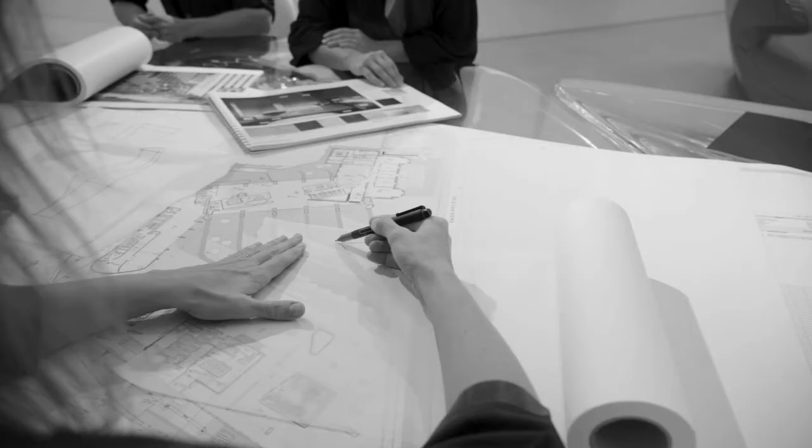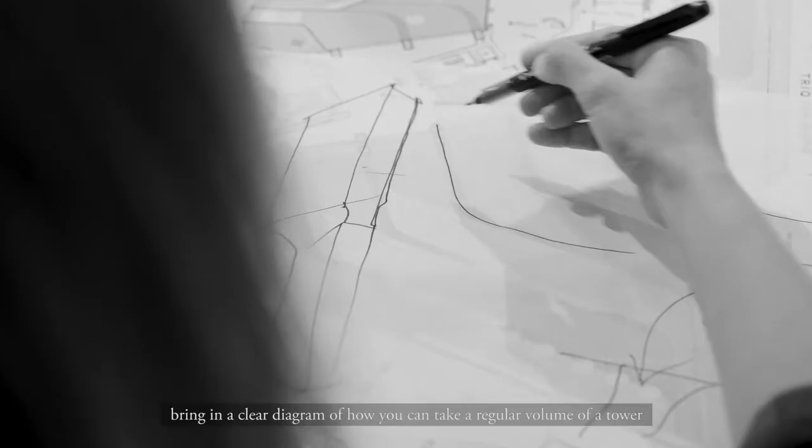Zaha used to say that she loves Mediterranean cities. The reason is that they're layered and full of surprises. With our work, we always try to challenge this idea that a room needs to be 90 degrees, a building needs to be a cube, and so on. What we've done with this project, which Zaha personally oversaw at the very beginning, is to bring in a quite clear diagram of how you can take a regular volume of a tower and really twist it, and see what happens when you do this.

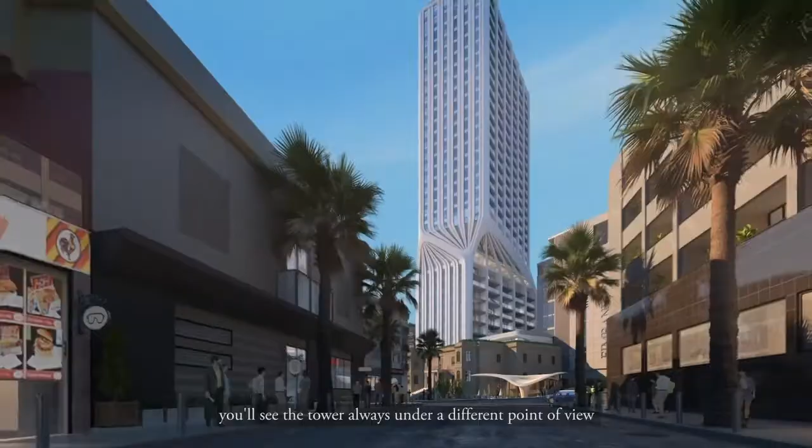As you approach the project from the various streets leading to the main square, you'll see the tower always under a different point of view, and the twist will represent a constant surprise.

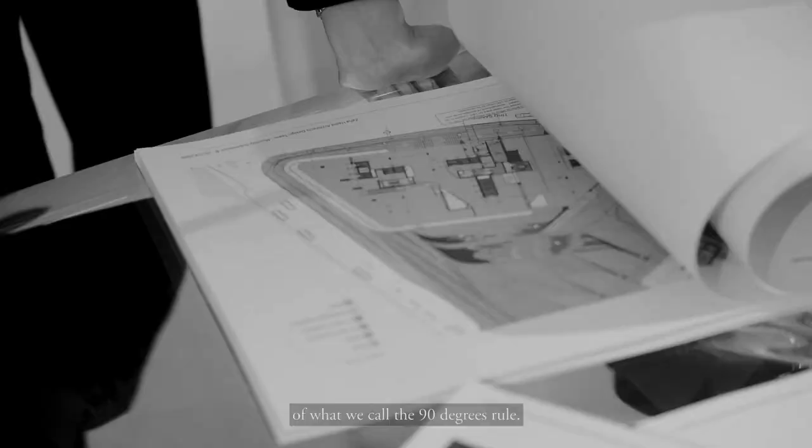Zaha used to say that life doesn't work with 90 degrees. All our work, in a way, is focused on challenging what we call the 90 degree rule. 90 degrees isn't something that happens in nature. In nature, what you have is a variety of geometrical constructs.

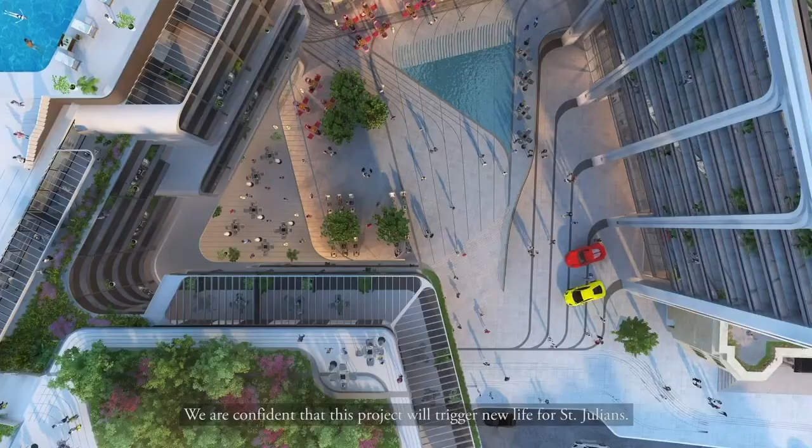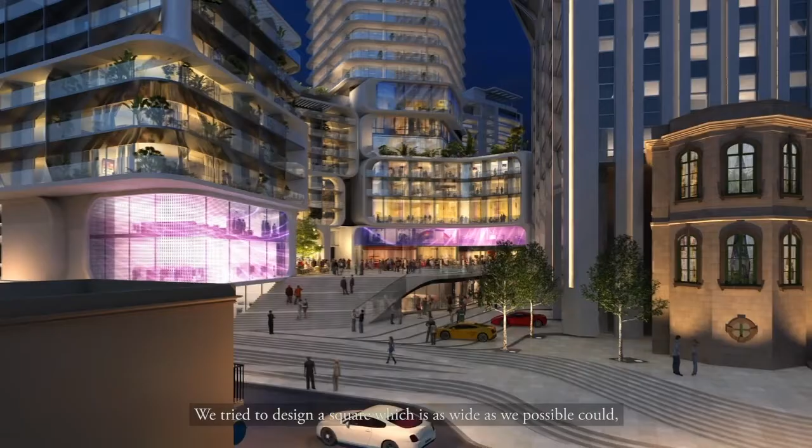We are confident that this project will trigger new life for St. Julians. We are hoping it will mean that St. Julians becomes more inclusive and more appropriated by the residents. We tried to design a square which is as wide as we possibly could. It's a moment of relaxation, very green, including reflection pools, so it's a very nice and calm moment within the busy life of St. Julians.

Great, I hope this was the best start for you to see more visually talking about the project.

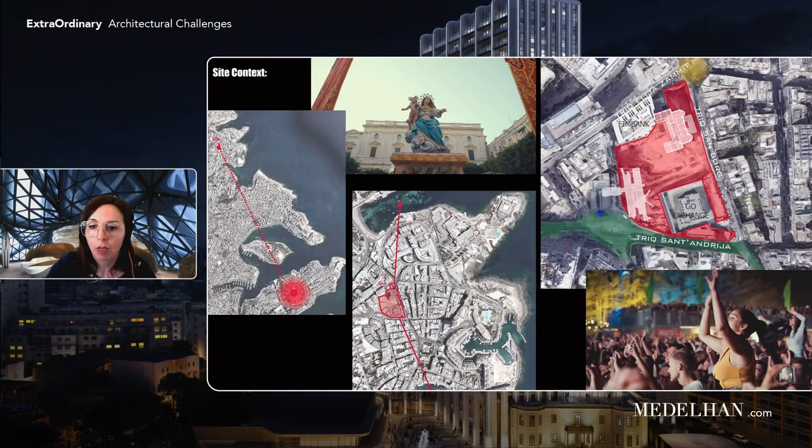We designed this project with Zaha just before her untimely passing, unfortunately. So in a way, this project was lucky enough to have the chance to give Zaha the possibility of tangibly expressing her own spatial philosophy.

The idea that we introduced is quite simple. We wanted to just work with a very simple tower block, but giving it this extra twist. And we think this is an interpretation of what Zaha was claiming as a refusal to adhere to a 90 degrees rule.

We wanted a project that is full of surprises, and because of this shape, it will appear completely different whenever it's seen through the various tiny alleyways in Paceville.

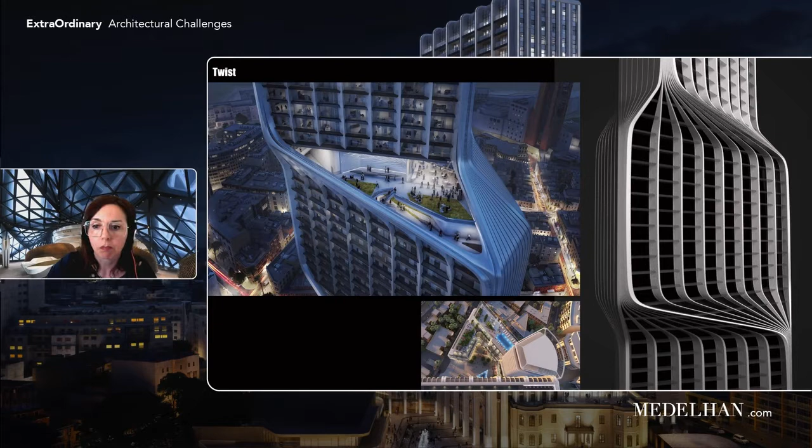We wanted it to be surprising inside as well as outside. So on the inside, we used the twisting of the tower to provide opportunities for some really unexpected open spaces, such as a pool floating midair and looking down onto San Giuliano.

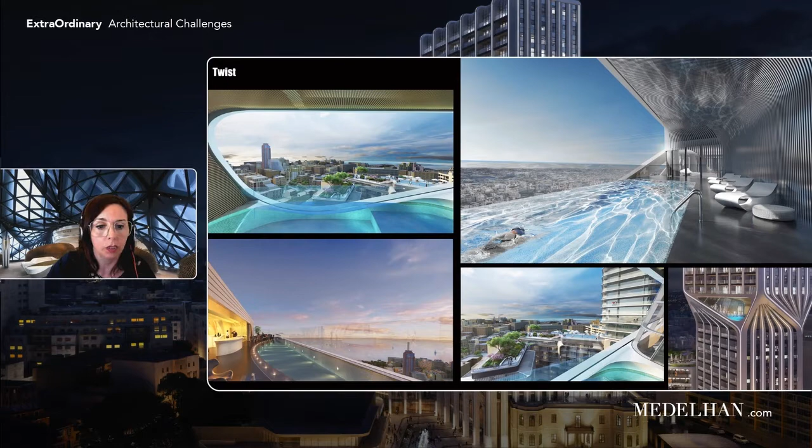Also, the treatment of the grades, the treatment of the lower levels, was very important. Paceville is a sloped area, but it's also very densely populated, so it doesn't have any sizable open space to offer. We would like this specific square, Mercury House Piazza, to become the beating heart of San Giuliano.

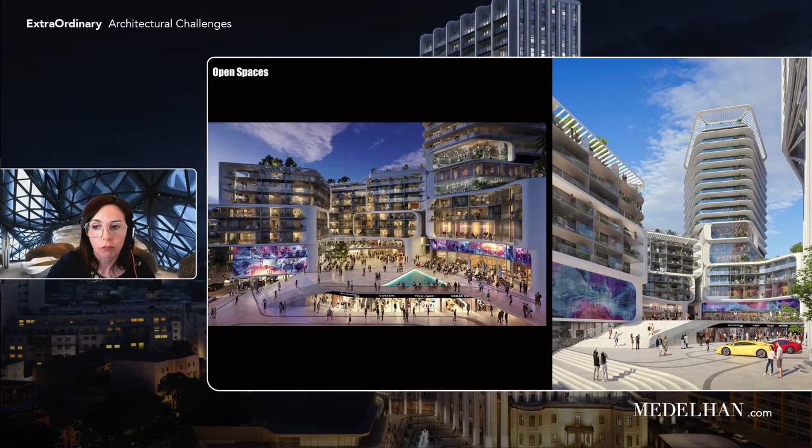For this reason, we paid a lot of attention to reconnecting the various levels through this sloped site, and also encouraging as much as possible cross-pedestrian circulation.

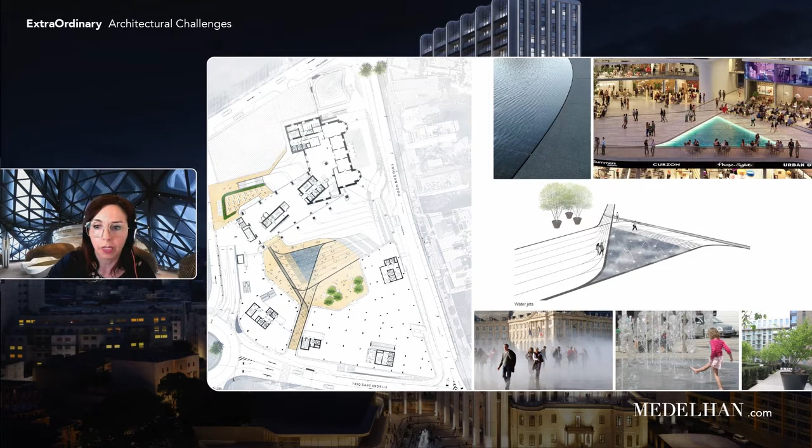As you can see, the square is located and articulated over two levels. The higher level is designed in such a way as to maximize opportunities for people of all ages to enjoy the space, but also allowing as much flexibility of use as possible.

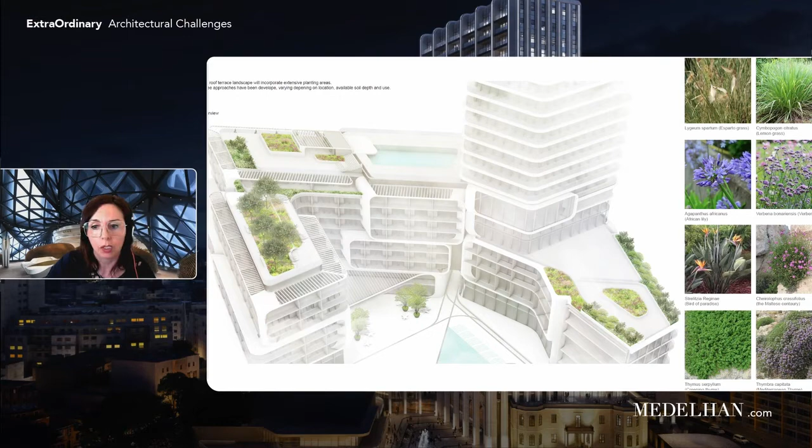And the greenery, in order to allow for this flexibility, we pushed as much as possible up onto these terraces, hanging gardens that were designed as expanses of semi-wild vegetation, rich in local autochthonous species from the island.

So this is a very complicated area, not only because it's at the heart of a densely populated area, not only because it's sloped, but also because it's dotted with heritage.

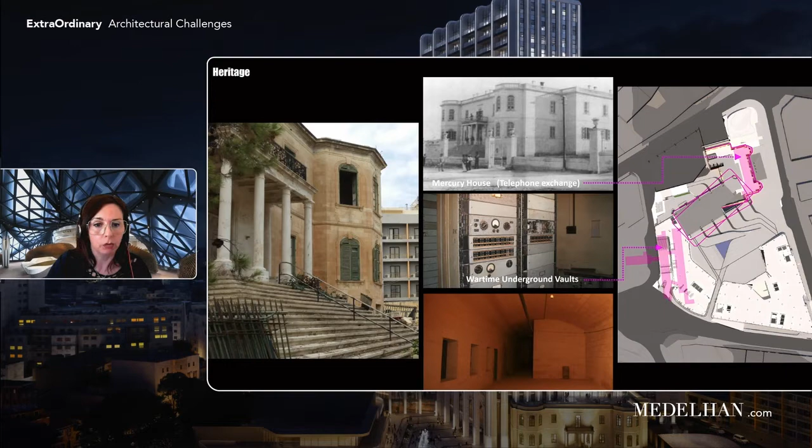The house has been preserved as much as possible. The pink bit that you see here is what was left of the house, and there were two longer side walls also in pink. We took the liberty to encroach on the house, involucring it within the tower, because we felt it was important to establish this connection, and we didn't damage or alter any parts of the house in doing so.

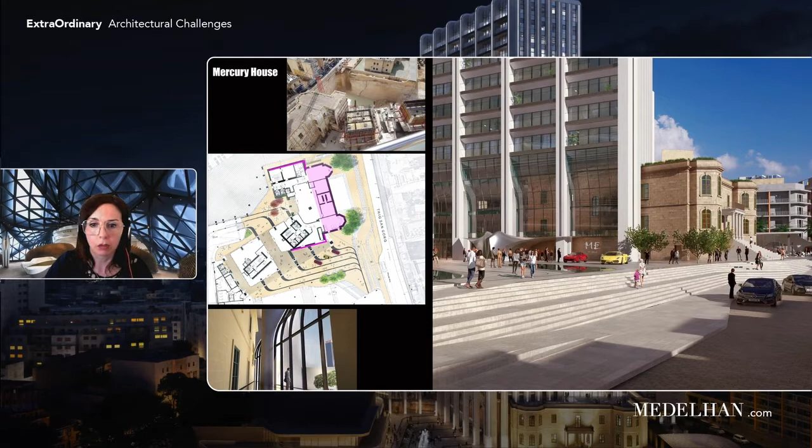This house has a solemn elevation and a bit of a stern look to it, and it's located right at the heart of the busy nightlife of Paceville. So we tried to mediate this relationship by introducing a retail pavilion, which you can see in these pictures.

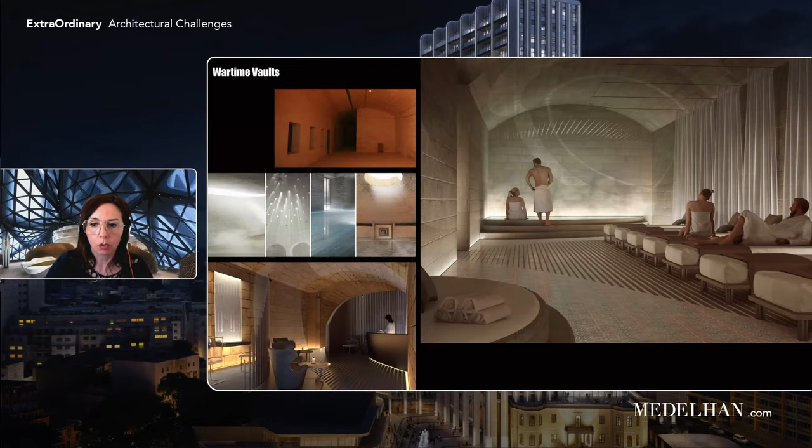The underground wartime shelters have been respectfully reinterpreted. We turned them into a wellness center with an adaptation that is fully reversible, so at any point they can be brought back to the existing structure.

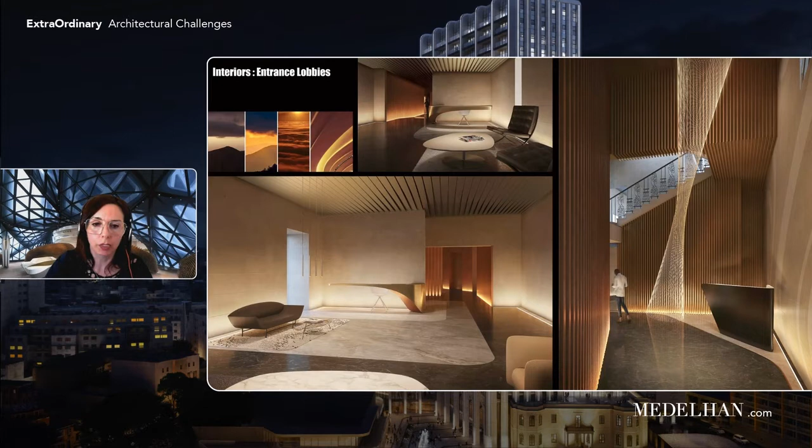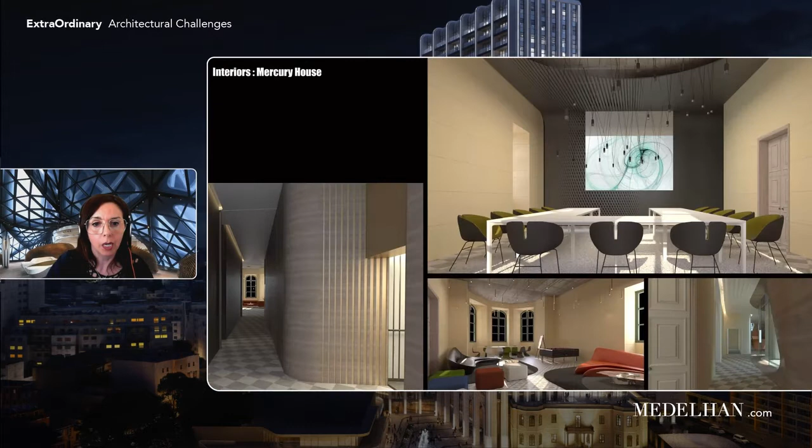The restoration of Mercury House was also carried out with as much of a light touch as possible. We tried to keep the identity and material quality of the existing building, but we also tried to adapt the client's brief to the scale and atmosphere of the 19th century house, keeping small rooms and preserving everything we could find, the window frames, the doors, and so on.

So whilst we really celebrated the presence of this heritage building within the envelope of the tower, we also tried to have a very subtle transition between old and new interiors. The old and new interiors really blend together quite nicely, you don't really feel much of a threshold.

People will probably think, okay, this is not your typical Zaha design, but we did have occasions to deploy our signature interior design language in key special moments, such as this tower twist we were talking about before, in a number of sky lobbies, pools, and a radio bar at the very top of the tower.

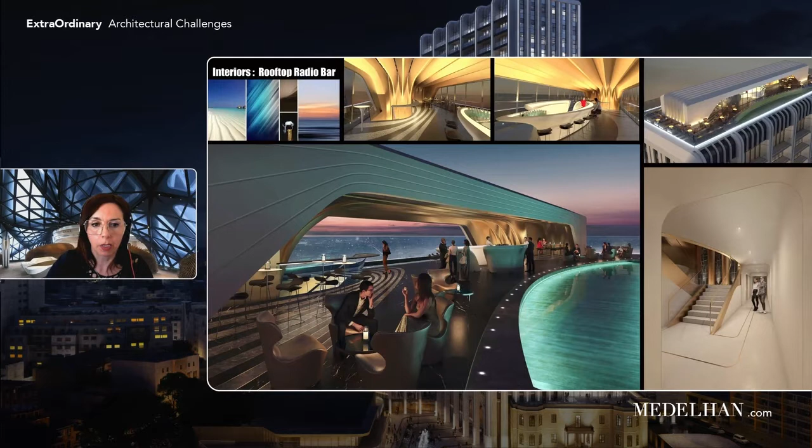This one is one of the bars located mid-level. And this is the radio bar located at the very top of the tower with some breathtaking views of San Giuliano, Valletta, and the Maltese coastline.

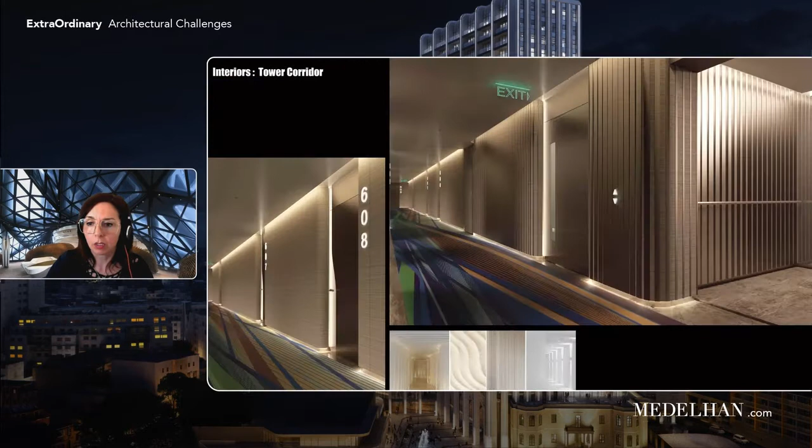In the guest rooms, we had a very close relationship with the hotel operator. They wanted to bring in this distinct Mediterranean theme and feel, so we worked with clear palettes of ash timber and metallic champagne tones to bring in this feel of sand and water and these sort of colors.

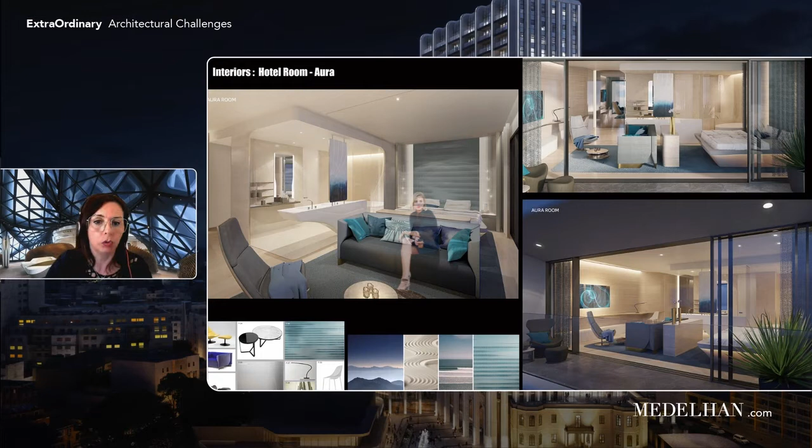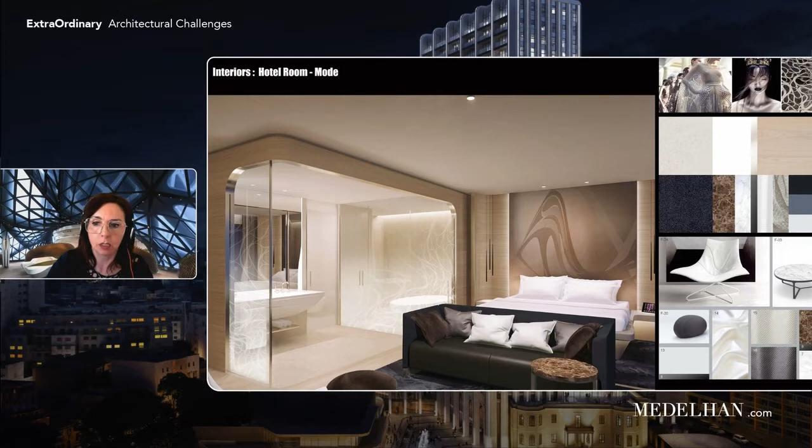Some rooms the operator wanted to be more introspective, so we interpreted this with a completely different palette, as you can see here. Or here, some rooms were meant to be more arty, so we worked a lot more with signature pieces from our collections, such as wallpaper and rugs.

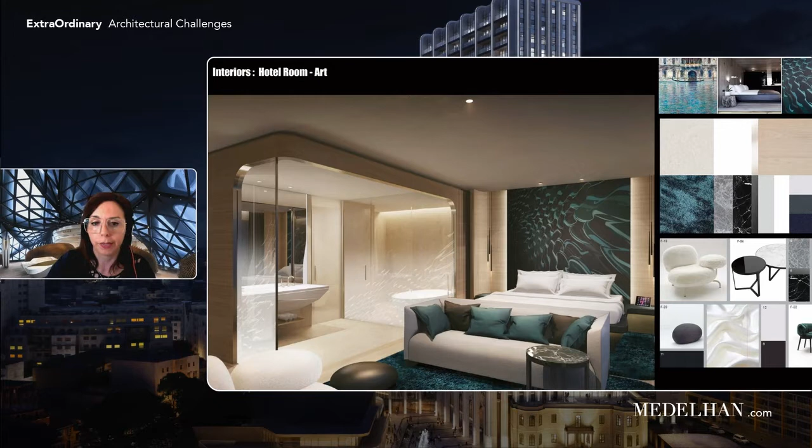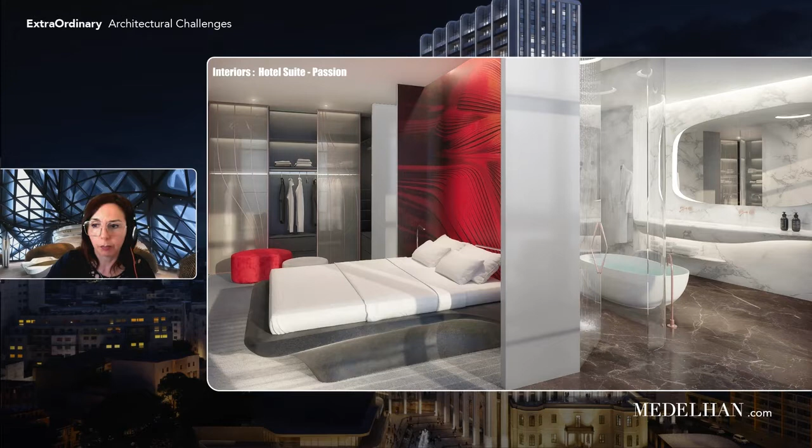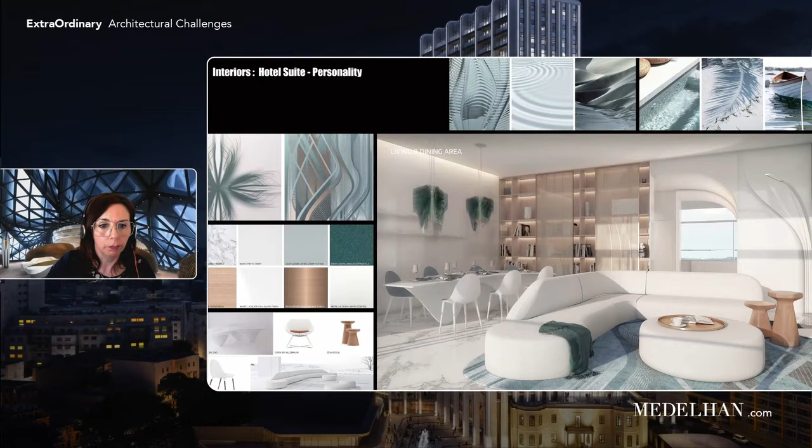The suites also varied a lot in size and inspiration. Some of them were very compact, like this one. This is one of the intermediate ones that still enjoy some very special living areas and amenities. We've selected materials, we've selected furniture, so we really went through very thorough detailing for the guest rooms. This one is one of the living areas for one of the suites.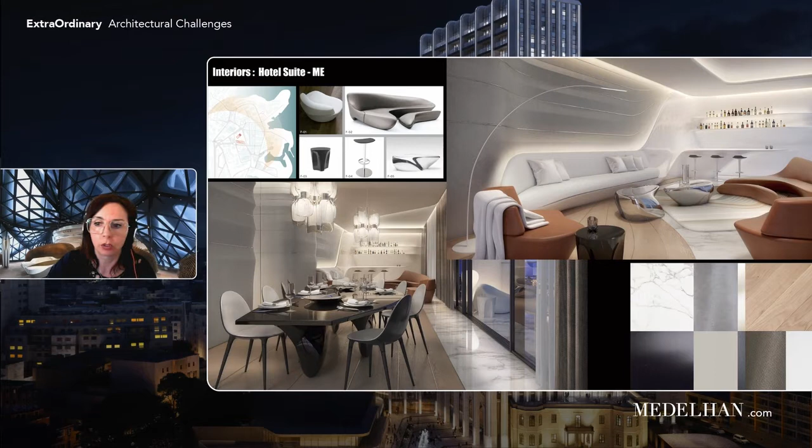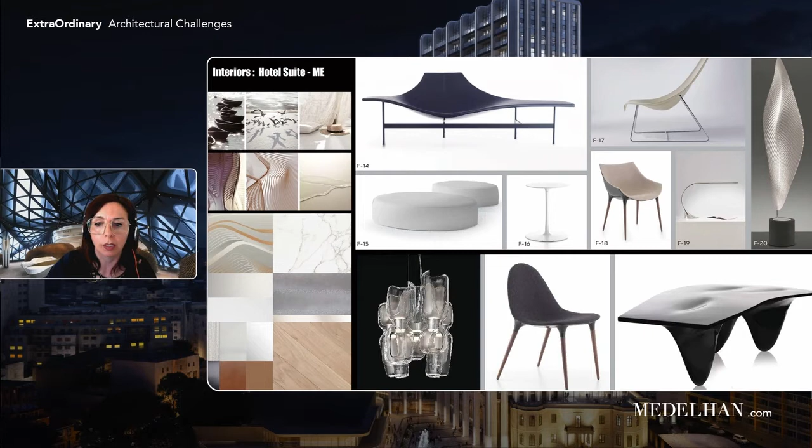There's a very special suite which is 150 meters big, so it's really like a large apartment with 270 degrees onto some of Malta's best beaches. For this suite, of course, we selected much more special fittings, fixtures and furniture. It's been designed in such a way to conjure a much more intimate but luxurious atmosphere, and here we really try to kit it out with our limited editions and really get this kind of Zaha feeling to it.

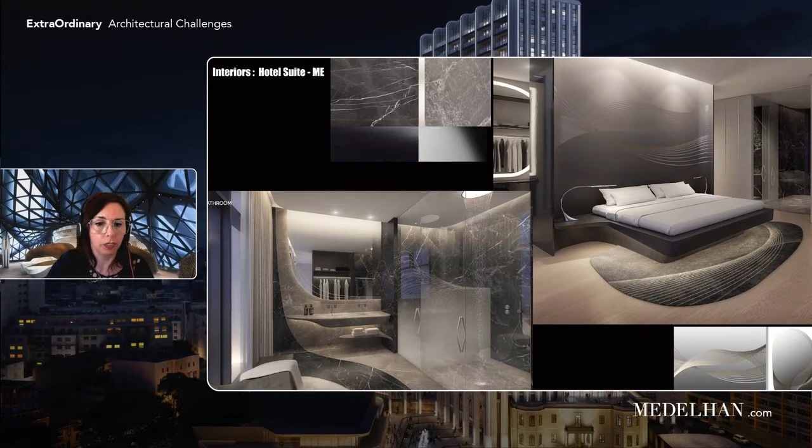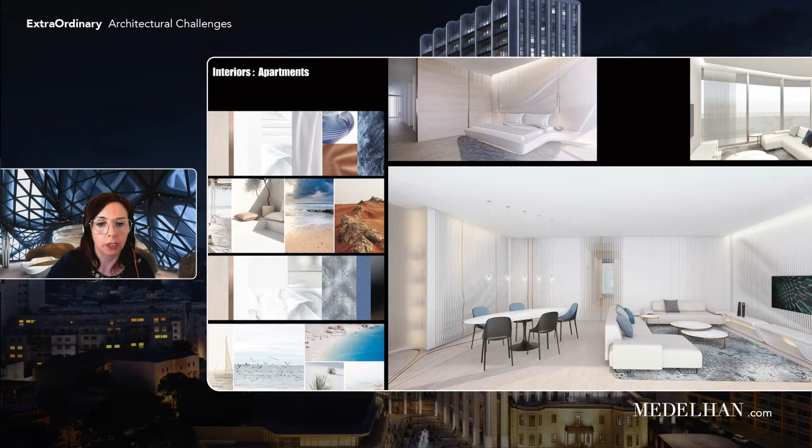The development also includes some apartments, which were designed intentionally in keeping with the client's wishes, with a very light palette, very luminous and very Mediterranean feel. There's also a 4-star hotel, which is a lot simpler, but it's been designed with the same level of care and attention.

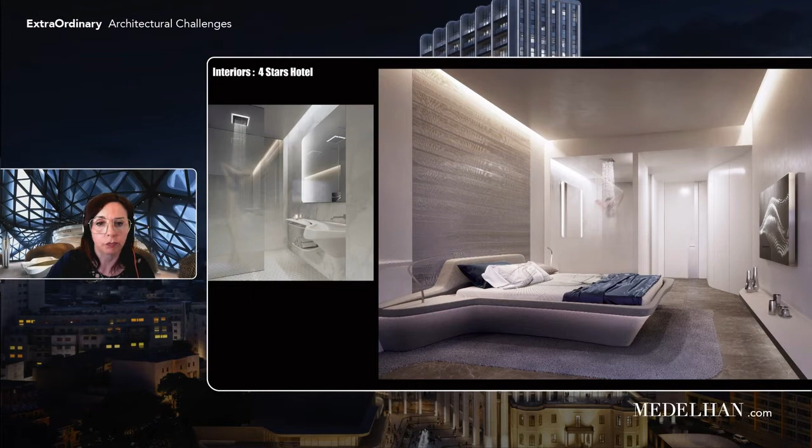I love to see that in this case we are talking about a mix of historical and ultra-modern approach to architecture, so we might call it organic modernism. And I know it's a project related to the renovation and redevelopment of an iconic spot in Malta. Actually, this brings me to my question.

One of the current trends in design and architecture is hybridization. How does your project respond to the contamination between indoor and outdoor, between public and private spaces?

I think I'd like to talk about how we, as a practice, respond to this, because really and truly this is something we like to reinterpret. So the idea of a hybrid is something we interpret throughout our work over the years. Since I joined the practice many years ago, 20 years ago, we always played with this idea of hybrid. And in reality, one of Zaha's key design ideas was the integration of architecture and landscape, so that the terrain can become a building and vice versa.

So we really like to mix and disrupt building typologies, because we believe in the power of integration. We never want to design monofunctional buildings, to the point that if the brief is for a monofunctional building, we'll develop the brief as much as we can with the client so that it becomes more triggering for mix and occasions of clashes between different people and different typologies.

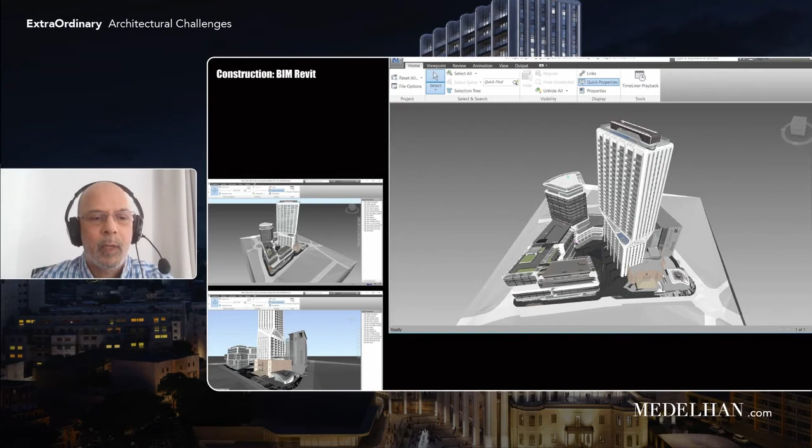Thank you. Hi. This is from the start of the project. We've been designing in 3D, from Rhino models to Revit models. This is to help coordinate with the design team, and also this BIM work has helped us with the design changes that have been happening throughout the project, but also the challenges that have progressed.

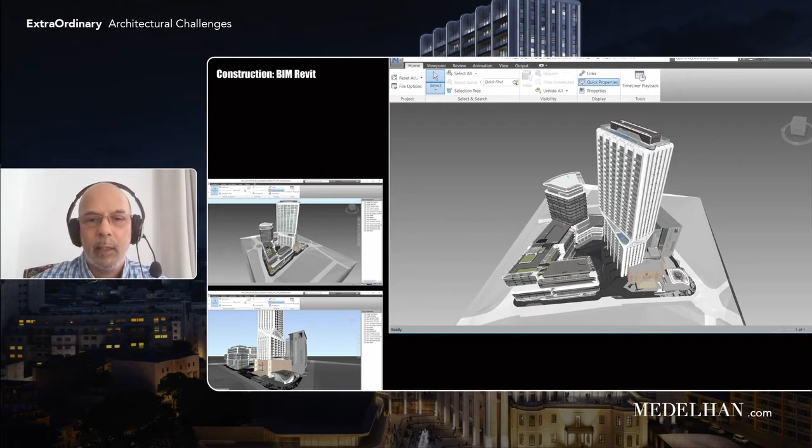The special conditions that we have in the project have been used in terms of the forms and the details, which have been developed to help the contractor and the client team demarcate the spaces and the interiors. These details, such as the podium glazing and the supporting steel structure, can be optimized for construction.

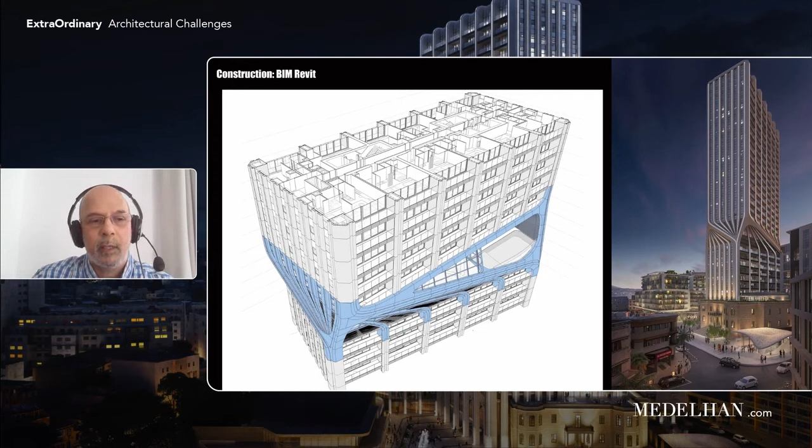In Revit, the principal forms and details have been developed not only to help the contractors, but also in terms of the forms, the cladding, the GFRC, and the actual optimization of the panelization of the facades.

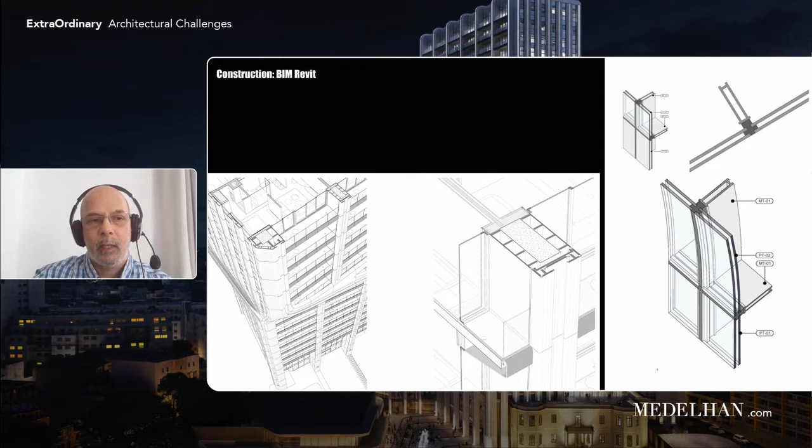As mentioned before, the site has been developed in two phases due to the timing of the project. The client obtained the phase 2 site, to the south of the main tower, at a later stage. Phase 1 is already up to level 33 and has topped out in terms of the concrete, whilst phase 2 is under construction, and we are still at design development stage in certain areas of phase 2.

The Mercury House is an architectural interconnection between the new and the old. This is an important aspect, keeping the front portion of the Mercury House and the sides. The internal use has been changing for some time, but now we're getting closer to the built form, and hopefully they can reuse this for the future.

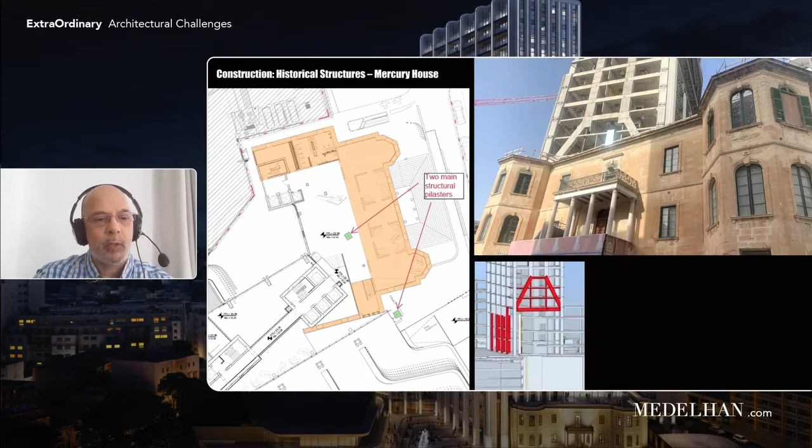The client and his architect are keen to restore the old historic building for the future. Parts of the facade have been restored and are being replaced in certain areas, obviously because of the age. There is also now a push to develop the balustrade to match the historic photographs, so hopefully this will happen soon.

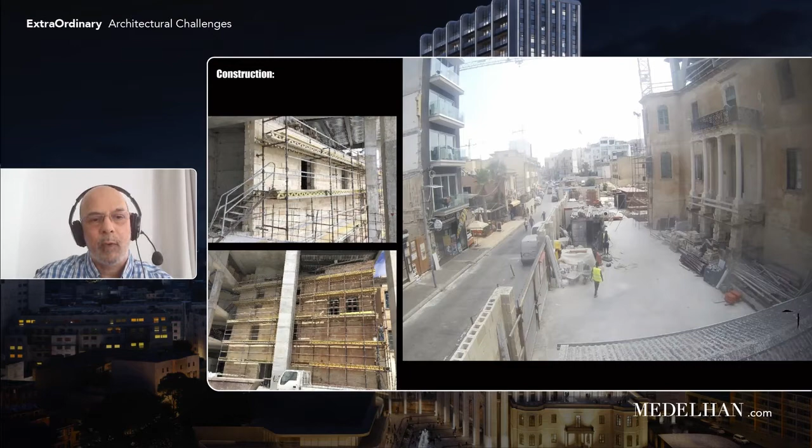One of the historical structures in the vaults is being developed as a health and well-being center, a spa area. We are keeping the confines of the stonework and trying to keep as much of the tiling on the floor, with some new minor interventions. We are also keeping a whole section of the vaults which contains communications and equipment, for historical record as well.

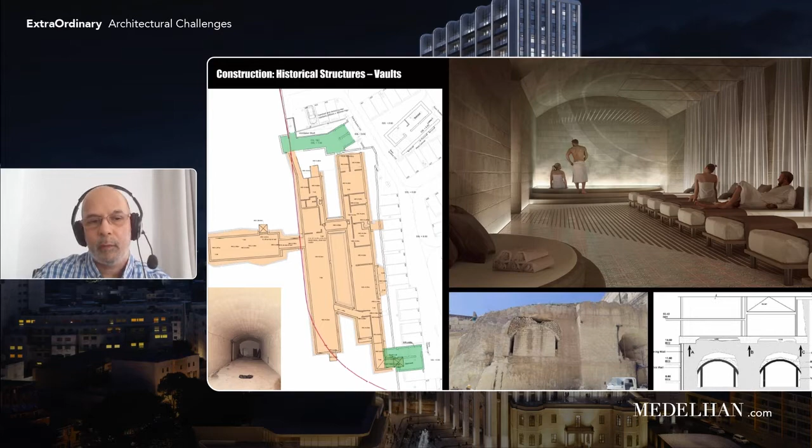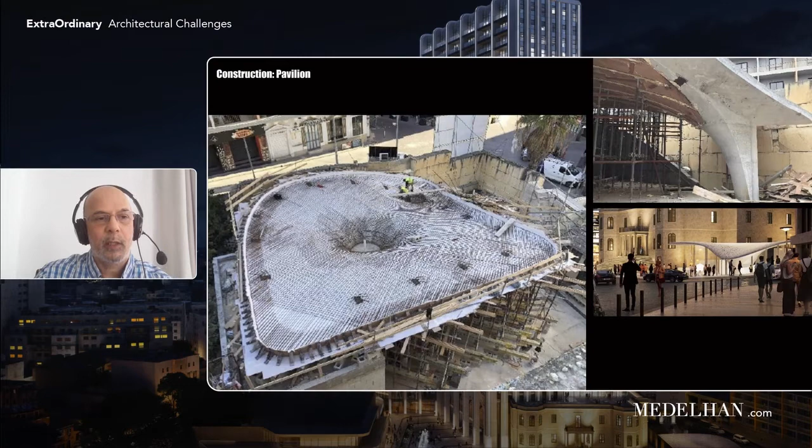The tower has evolved during construction, with the client making changes not only to the rooftop area to add a pool and rooftop bar, but also increasing the height. The upper part of the tower has increased by 4 floors. This has given certain challenges, but it will also make it more interesting in terms of the views, including the roof views at the top.

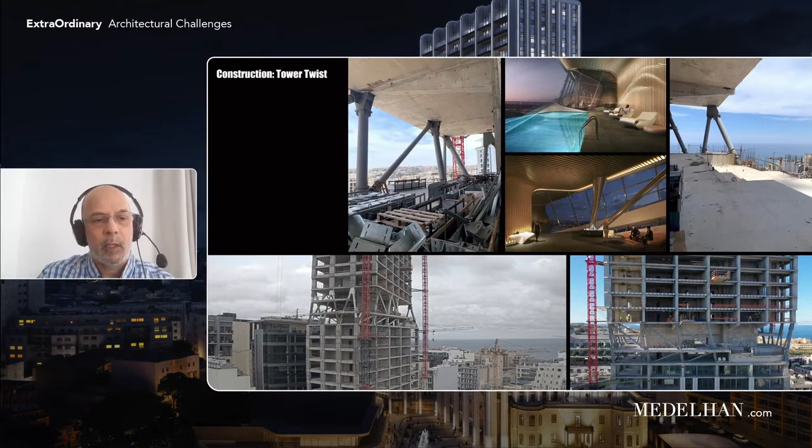Designing with the engineers, the steel structure of the twist area gives meaning to the architectural volumes of the pool and the internal spaces. It's sandwiched between two concrete structures, one below the twist and one above it. Hopefully the interiors and forms will take place very shortly.

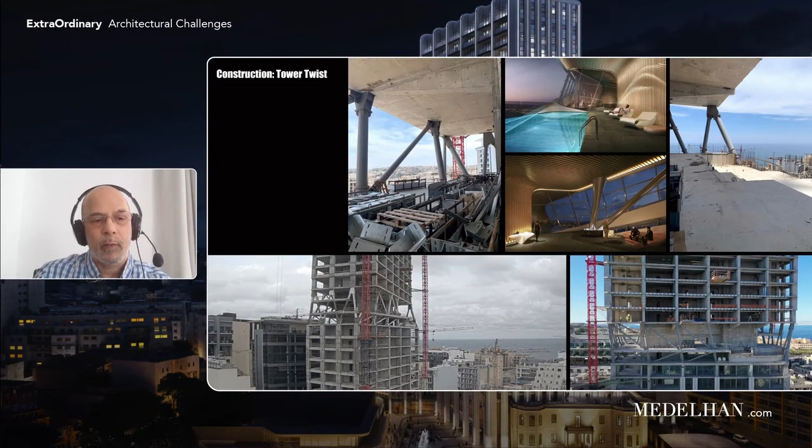On the rooftop area, level 33, you can see from the images that the pool areas have been formed in concrete. The steelwork is starting to be placed at this high level to form the rooftop bar steel structure. We are also providing additional viewing platforms, one with a glass floor, and the level 30 rooftop area will now also become a viewing platform.

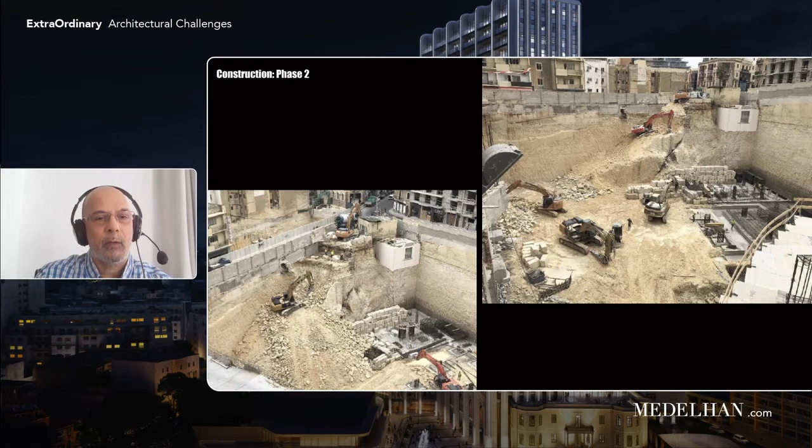The phase 2 excavation has now been completed. There are two images showing the final completion of the excavation.

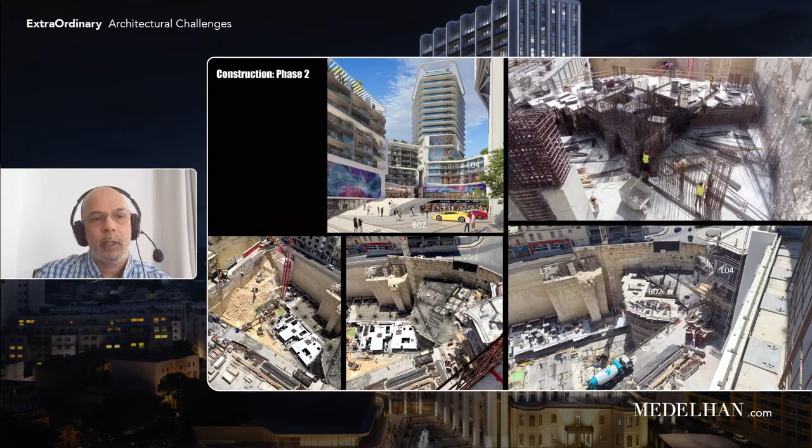Lastly, in the phase 2 area, the hotel tower now accommodates the new guest rooms and hotel rooms for Melia. Originally the rooms were designed in the main phase 1 tower, but now they'll be placed in this smaller mini tower, and some of the room designs will be reviewed with the client team and the hotel operator.

Construction for the tower and the surrounds of the main hotel tower, at ground level, basement B2 level, and the plaza level, is underway, and the rest of the site is basically under construction in terms of the basement areas.

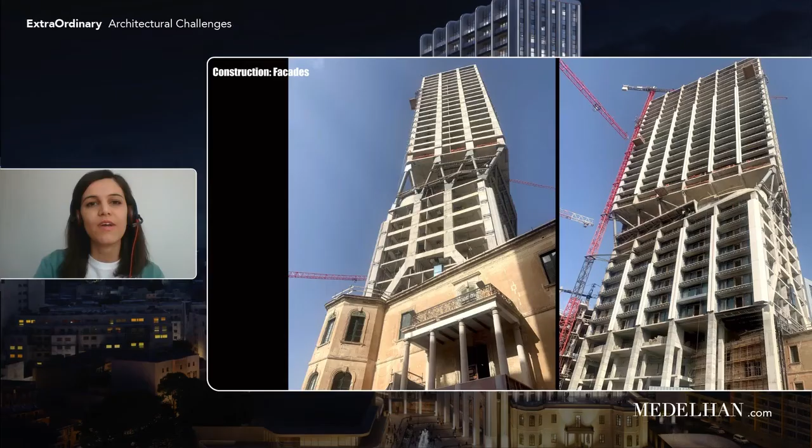Thank you very much, Patrick. In terms of facade installation, this is where we currently are. On Phase 1 tower, we started installing the GRC cladding up to level 25 and the sliders at the balconies. Being a fast track design and build project, we are in the process of finalizing the design and shop drawings for the complex areas.

On the shore facade, we are using unitized system panels. The shop drawings are approved and the panels are in production at the moment. As you can see, the contractor has already started installing the brackets to support the panels.

At the very beginning of the construction stage, the facade contractor produced a preliminary mock-up of a typical balcony, testing the various elements of the design. We were able to try out different color schemes and see the lighting effect of the GRC strips for the first time. This was our starting point for several refinements that came at a later stage.

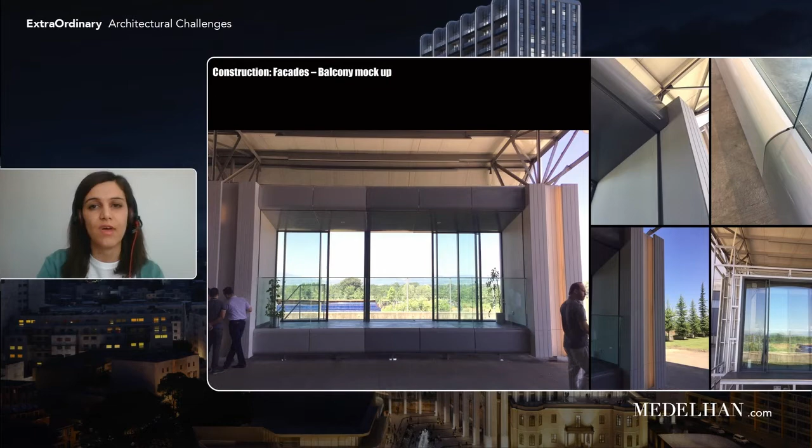Going into more detail, the main architectural features of the tower are the heavy shot blasted GRC strips coated with waterproof and anti-graffiti neutral sealant. We also have two lateral cavities at each strip that will allocate the LED luminaires to light up the tower. The intent from a design standpoint is to create an interactive lighting show at nighttime. This was specifically requested by the client and carefully studied with tests on site.

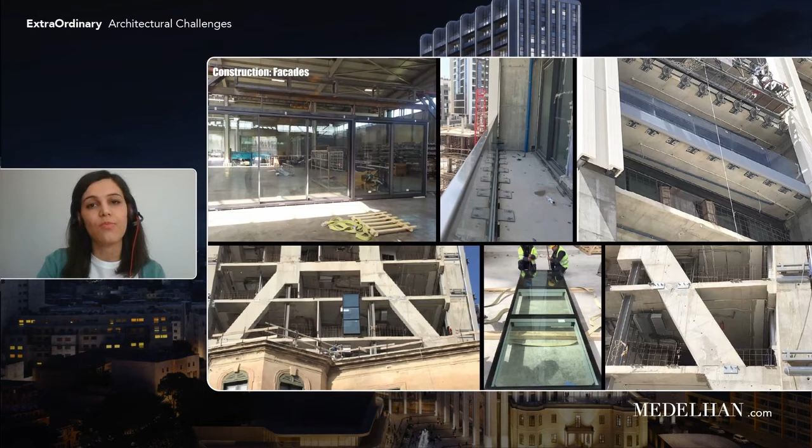The facade contractor installed an on-site mock-up of a typical balcony with low iron glass balustrade, an aluminum fascia covering the balcony slab, and glass sliders. They are planning to complete it soon by adding the balcony tiling, the waterproofing, and the render boards on the side.

On the shore facade, the contractor produced a mock-up sample of a unitized glass panel for approval and general quality check. We had quite a few challenges in this area, as after survey, the contractor found clashes between the design cladding and the concrete transfer structure. Therefore, before production, the contractor ran performance tests at their facilities, such as water, acoustic, and wind dome tests.

Unfortunately, at the time we were not allowed to travel due to the pandemic breakout, so we could only follow up in real time on all the tests via Zoom. Some of the performance mock-ups were used to visually validate and agree on the unitized system frame's appearance and spandrel colors. So this is the twist.

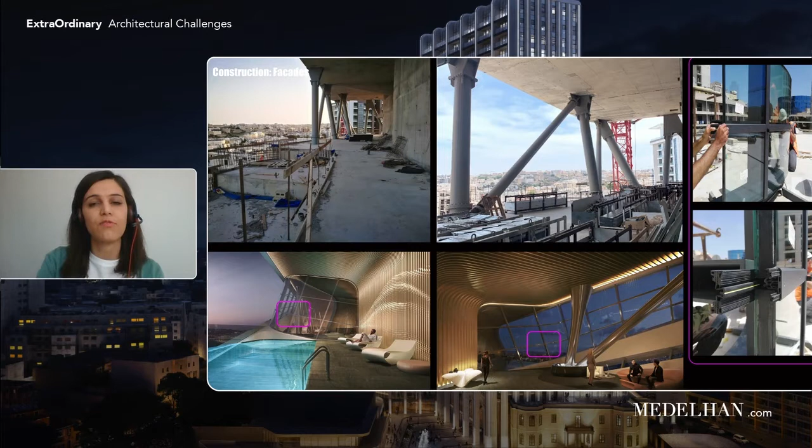We are also in the process of concluding the design drawings with the facade contractor. We have finalized all the material selection so far, and the contractor has produced a mock-up for the steel and glass facade facing the suspended pool area. In general, we are currently in the process of approving and validating all the technical aspects of the mock-ups.

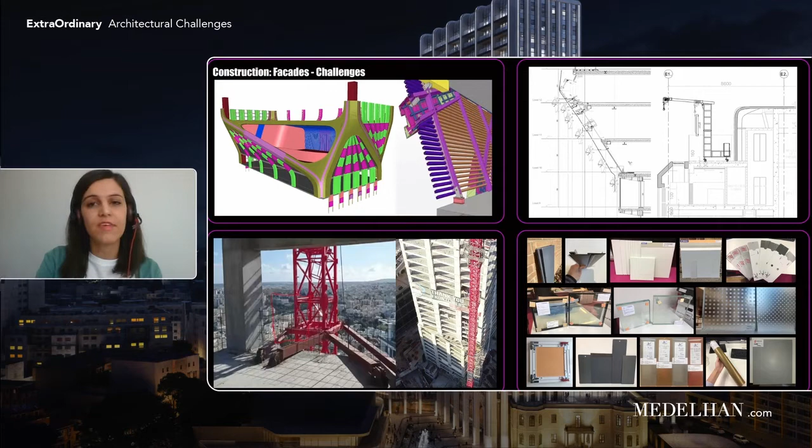As you can imagine, we have been facing quite a lot of technical challenges, starting from the geometry and drawings for the whole twist area, which present complex details and interfaces. Then the rotation of the tower led to a specific facade access and cleaning strategy, so we opted for a portable BMU at the rooftop, and the abseilers will abseil down and hook anchors placed at the twist area. Also, the position of the crane is causing installation issues at the corners, and the contractor will likely install the leftover panels after dismantling the cranes. I should also mention that due to the pandemic, the contractor had quite a lot of procurement issues in terms of material, so we had to investigate replacement in a very short time frame.

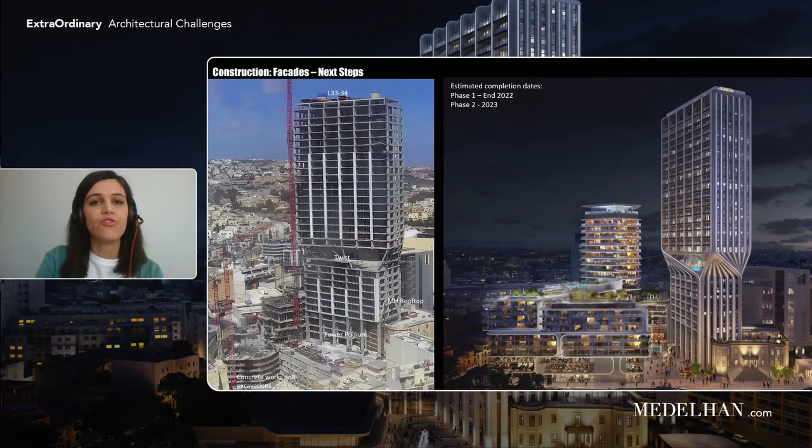To conclude, the next steps will be finalizing the facade design for the tower podium, twist, and the rooftop in general. In parallel, we are aiming to conclude DD on phase 2 in the next couple of months, and carrying on with all the concrete works and excavation. So the estimated completion dates are end of 2022 on phase 1 and 2023 on phase 2.

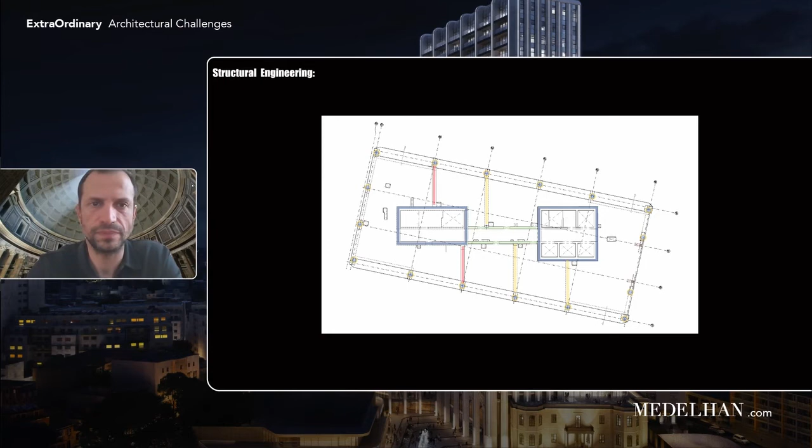A building like this has different ways to approach it, but one very important thing is to understand the stability of the building in terms of vibrations. Because it's a cantilever and the building has 33 levels plus 6 basements, that's a building that ends up being 39 levels. The basements in this case are not fixed against the ground, which means the tower needs to resist the whole height itself.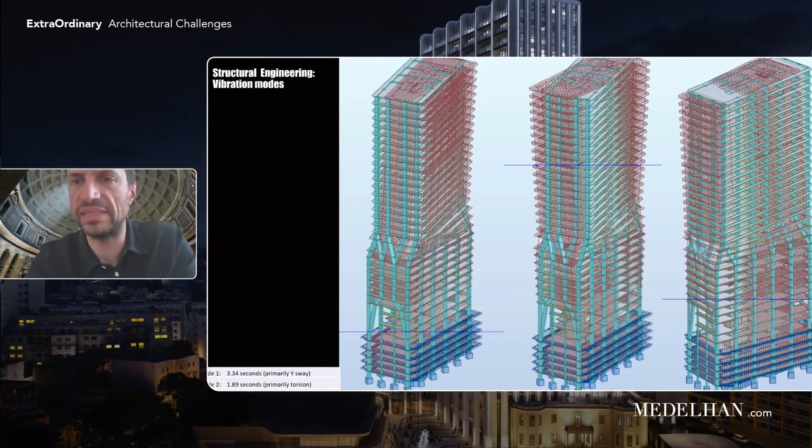So we did an analysis of the vibrations to understand how the building performed. With this analysis, we make sure that everyone in the tower, even at the highest or lowest levels, will always be in comfort. That's our milestone.

These vibration modes were analyzed with the wind loads. As Elena said, we did this tunnel test that you can see in the picture, carried out in London. This tunnel test was key to understand the performance of the tower against wind loads, and also to determine the wind load we needed to consider on this island, because local regulations tell you somehow which wind load to consider, but not at this level of detail. So we came up with a very low force of wind, which allowed us to use a lesser quantity of reinforcement for the tower.

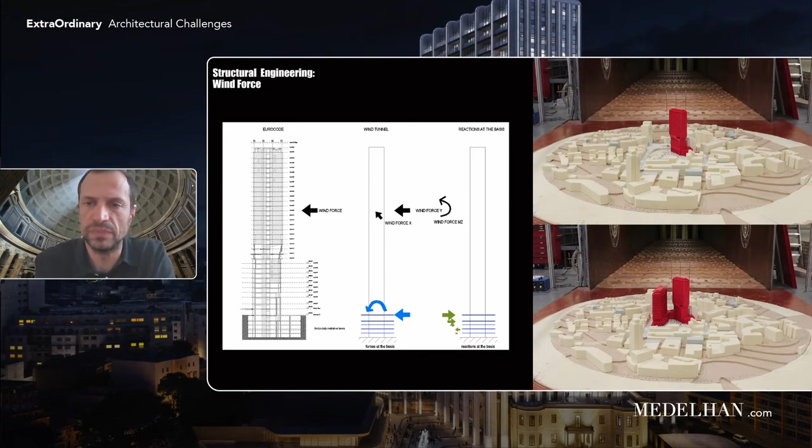The basement, or the foundation level, is made by footings. Some of them are bigger, some smaller, but at the end they are isolated footings because the ground is quite capable, even though these 6 basements are limited because we were at the same level as the sea.

Then I want to introduce the different challenges of this tower. As you can see on the left, we have the twist. The twist is probably the most exposed challenge you can see on the building, and its defining characteristic. It was, in fact, a big challenge.

Then below, in cyan, we have the colonnade - a gesture in terms of architecture to have a better understanding of the building from the plaza. Then we have the transfer, in red, transferring big columns and big loads on top of the existing Mercury House, while respecting it. And then we have the canopy on the rooftop, which is probably the biggest span structure in this building, with close to 30 meters span, so it's quite a lot.

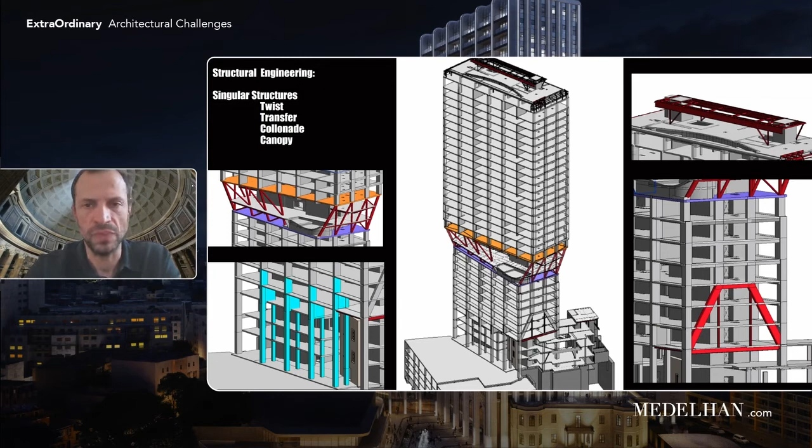Even despite this big span, the most relevant factor is the wind loads we'll have at this level. So here we have some pictures about the twist. As you can see, it's made of steel structure, covering the 3 levels that embrace the twist. In these 3 levels, we reach cantilevers close to 9 meters, which is quite a lot.

The steel structure that you can see is mainly the one that is exposed, but there is another one on the level above and the level below that is inside of the concrete columns, just to transfer the load that is coming from the steel structure.

This steel structure has many responsibilities. One is to transfer the vertical loads, but the other one is to have enough stiffness to keep the building in place and transfer the horizontal loads to lower levels without too much problem. As you can imagine, whenever you have a twist structure, the problem is that this structure can twist more, and that's what you need to keep in place.

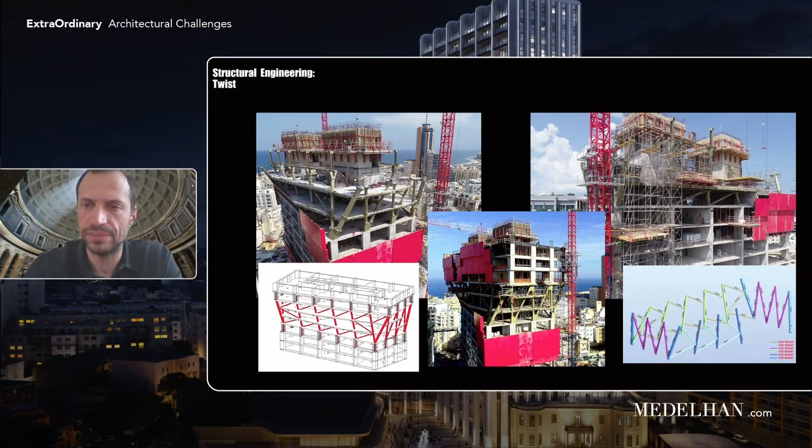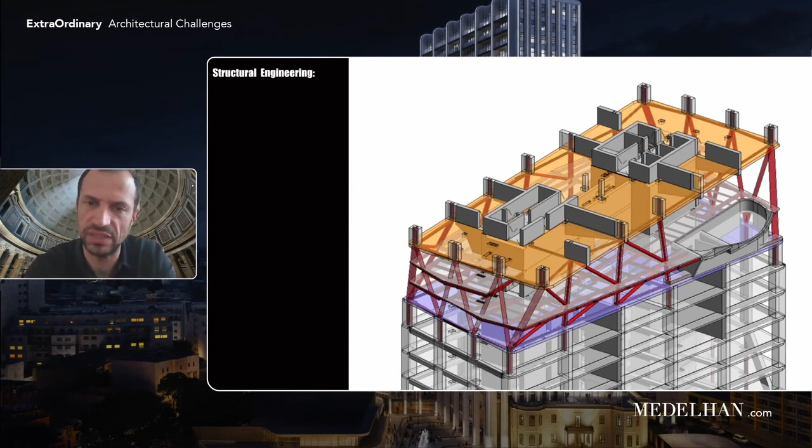So in that case, as you can see, the building is shifted, and there are some internal shear walls that we already saw in the pictures, and then we have this pool on the twist that don't allow us to place a steel structure there, because we want clear views with nothing structural that bothers the views. So we have another transfer structure from levels above that avoids this load going down. In addition to this 15 degree twist, we have this void to allow the placement of the pool.

Another challenge was the transfer on top of the Mercury House heritage building. This was quite challenging as well, because we have all the load coming from the upper levels to this level. So we need to define a transfer that moves all these loads to the exterior columns, and at the same time have enough space to keep the levels as a regular building, because all the levels of this building are still there. We decided to go for this type of structure, where we transfer the loads with an inclined column, and this inclined column has a hanger that hangs the existing levels we have below, just on top of the Mercury House.

And on the left, we can see the colonnade. The colonnade is also quite challenging because we are just on the lower level and we have to divide the load that is coming from the upper levels to columns smaller than what is coming from levels above. And this opportunity for the structure allows us to have a better space in the plaza.

And then the canopy on the rooftop, with a span of about 27 to 30 meters, will be built in the coming months. It's probably a very interesting structure because it's not only having this long span, but also transferring all the load to the concrete structure, not onto the columns below, but to an element that transfers this load to another column. So it's in itself a challenging element.

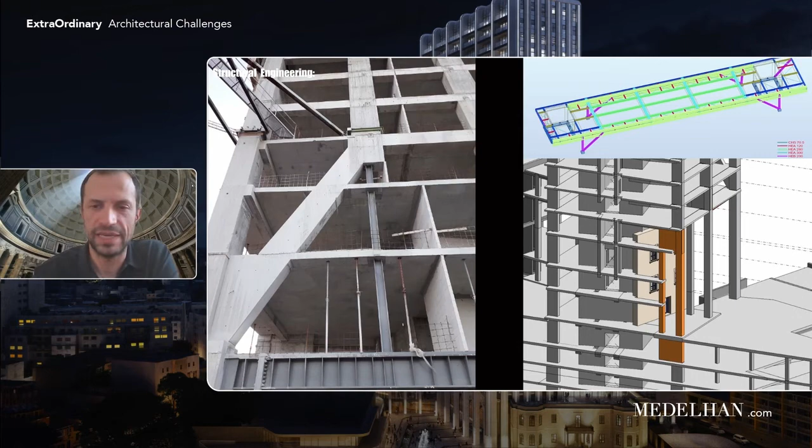And then, just to close the presentation, here you have the picture from when we arrived at the 33rd level of the tower. That's the crew of people working on this project. And of course, we are very happy, not just to finish, but also for this amazing view of Malta, Valletta, St Julian's, the sea, and everything.

Thank you very much. Thank you, Xavi.

Glad to see all the components of a project like Mercury Towers. And I have a question for you. You are an engineer from Buro Happold Engineering Consultancy Group, and I know you are fully engaged with the integration between technology on one side and architecture on the other. I know you already touched on these points, but I would love to know what was, in your opinion, the biggest and most stimulating challenge you faced with the Mercury Towers, considering also the iconic and historical place we are talking about?

So I would say that all these challenging points I highlighted in the presentation were about integration of architecture and engineering. Of course, the challenge was how we adapt the structure of this building to the architectural needs or milestones. The twist is very important because it gives the identity and the iconic character of the building. That was probably the first one we tried to solve as easily as possible.